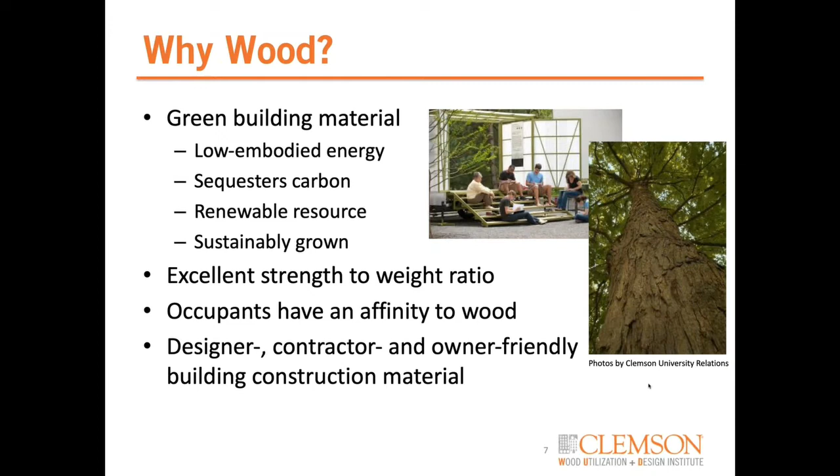For others, it's a sense of peace and calmness. Another architect I think a lot of talks about how when he has a wood column in his building, people touch it—he's even seen them hug it. He said that if he has a building with concrete or steel, you never see people reach out and touch that part of the building; they don't touch a column. But with wood, they almost feel drawn to touch it. There is something about being in a wood building that makes people feel very comfortable, in a very natural environment.

So being a forester, I'm going to start with the forestry side of this world. We're going to talk a little bit about the resources. In North America, we have a lot of forest. While it's not distributed exactly the same across every landscape—the Southeast, the Pacific Northwest, the Pacific Southwest, the Midwest, the Lake States, even the Northeast—there are adequate and wonderful resources of timber available.

There may not always be a sawmill nearby to use that timber, but there is timber growing that could be used. The Pacific Northwest and the Southeastern United States produce a lot of structural timber—2x4s, 2x6s, 2x8s that we use to build buildings. They're priced fairly well in general, and sawmills exist to utilize those materials in this area.

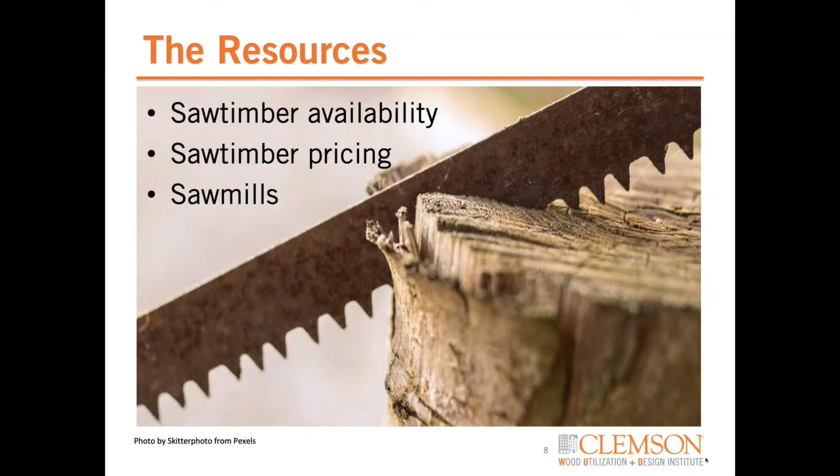So we're going to take a look, dive a little deeper, and I'll focus on data from the Southeast because I have that data available and I'm more comfortable talking about it. But the same data could be developed for the Pacific Northwest or other regions of the country.

In the Southeast, from 2007 to 2014, we saw a 3.4% annual increase in the amount of board feet available growing in our forest. That's the inventory, what's out there growing, above and beyond what was lost to death, fire, or removal. That's just the standing live trees and what was growing—that's how much we increased in sawtimber inventory.

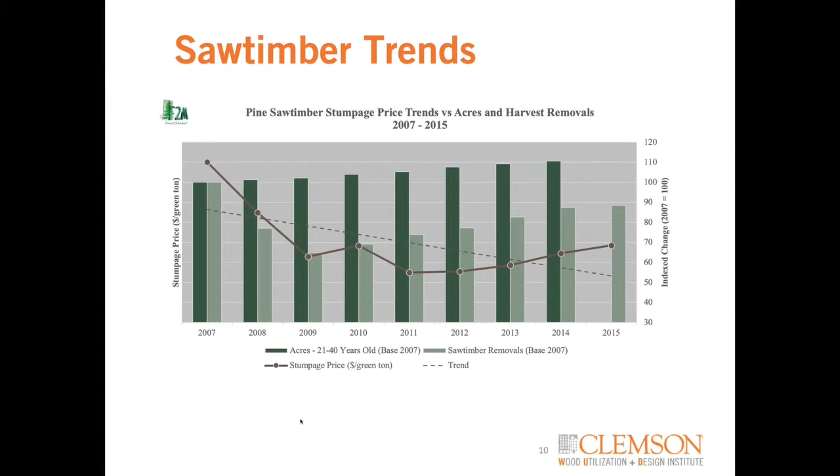That's how we're increasing these acres and ages and sizes of trees, the amount of carbon being stored, all that kind of stuff. The trend line shows you that the price has pretty much been going down all that time in that time frame. Not to say that any one price is given—I'm not talking about prices, just want to give you a trend here.

So what we saw was that in 1987 there was a U.S. government program called the Conservation Reserve Program, and it significantly increased the amount of land being planted to trees. This was pulling land from agriculture on erodible sites, deep sands, windblown sites, and other kinds of land that didn't need to be used for agriculture, and formally putting them into timberlands. This is the 3rd or 4th time the USDA has done that, and I'll show you some examples of when they did it in the 30s. This is the example from the 1980s.

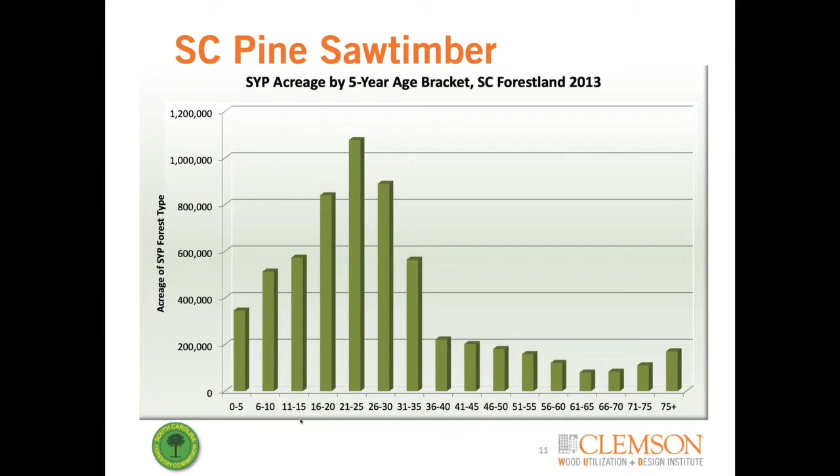But if you do nothing to those pine plantations, they will eventually, in some cases, be replaced with either a mixed pine hardwood stand or eventually a hardwood stand in subsequent successions. But in this case, we're looking at what they look like right now, and that succession may take hundreds of years. So here we go.

A lot of people are always worried about whether our forests are sustainable and healthy. A healthy forest—or an unhealthy forest, such as one with bug damage or overcrowding—is often seen as a problem for wildfires, especially the very destructive wildfires of the West Coast or even the Rocky Mountain area. Even in the Southeast, if we have unhealthy or overstocked forests, we may be more susceptible to all kinds of problems. So we do understand how to be sustainable and have healthy forests.

One of the things we find is that when we have an active forest market, a place for landowners to sell their trees or products from their forest, we're more likely to have well-managed forest in that area. That circle of forest markets and healthy forest is very important. Data has shown that where we have a good forest market, whether a sawmill, plywood mill, or pulp mill, the forest surrounding those mills actually increases in the number and amount of trees grown, giving us more healthy, well-managed forest in those areas.

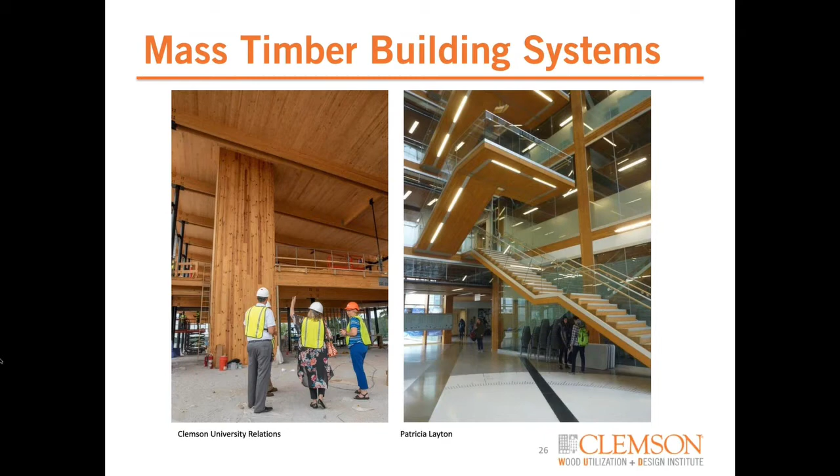If you ever get a chance to go to Vancouver and visit the University of British Columbia, UBC in Vancouver, take a chance to go into this building and see how it is. It's very breathtaking, especially if you're up top in the building looking out across the campus through the atrium glass windows and stuff. It's a gorgeous building.

So mass timber that we're going to use today and talk about in our discussion, I've mentioned cross-laminated timber. We're going to look at nail laminated timber, dowel laminated timber, and Glulam. There are a few other types, but I'm not going to try to go through all of those today, that's for another time and place. These are predominantly the four that have been used most often in buildings in the United States today.

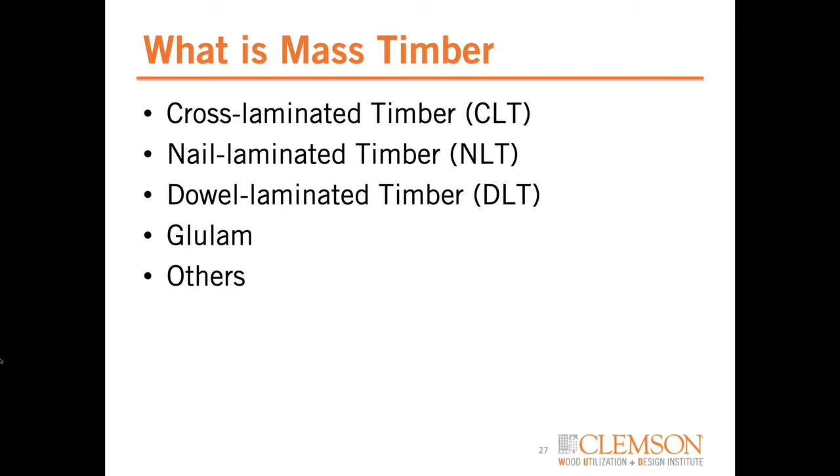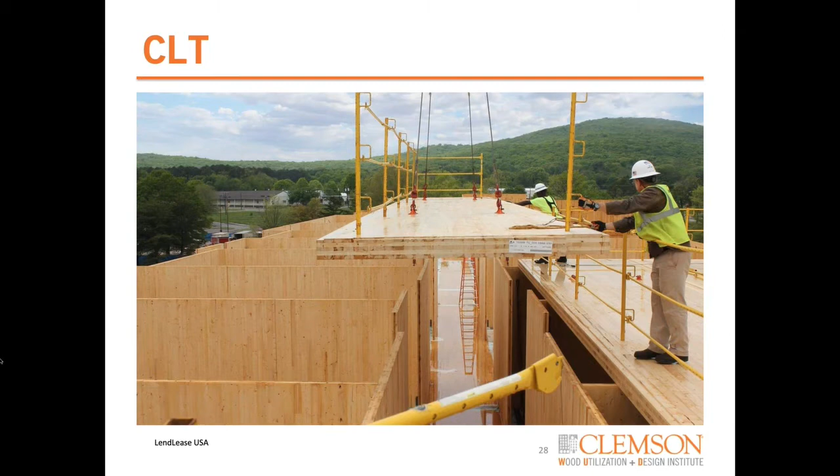Now, nail laminated timber, or as some building codes call it, mechanical laminated timber, is actually just 2x4s, 2x6s, or 2x8s laid on their side and nailed together. This is a very old type of building material, and many old manufacturing sites, mills, and old heavy timber buildings had floors built out of nail laminated timber.

This type of mass timber only has strength in one direction, so it does not have the cross-directional strength of CLT. Since it uses metal nails, when you put those nails in, if you need to cut a hole, you're likely to hit a nail, which might damage your equipment in the field.

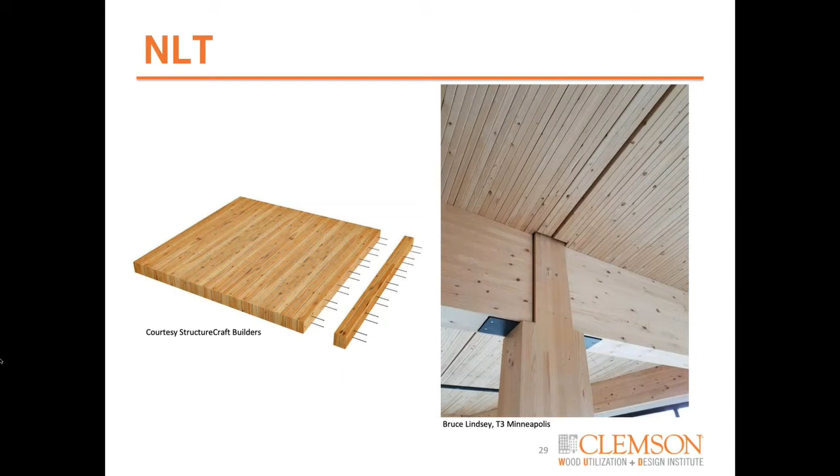So it's really important to think ahead of time about where you might want to put a hole and just gauge it in there. Building around things is really important. You'll see in the picture on the right, from the T3 building in Minneapolis, the floor panels are much longer on one side, and where they needed to stop it, they had to nail shorter pieces of wood together and build that structure on the ground beside the building, then lift it into place. So it does make a difference.

This is DLT, or dowel laminated timber. It's very similar to nail laminated timber, but instead of using metal nails, you use wooden dowels. I always wanted to know how things work, and I figured it out. They use a hardwood round dowel that they heat and dry to a very low moisture content, like 3%. Meanwhile, your 2x6s or 2x8s or whatever you're using is dry to where it needs to be, and then they drill a hole through it.

They've sized the hardwood dowel slightly smaller than that hole so it fits in, and then they allow the wood to come back to the relative humidity of the building environment. As that happens, the wooden dowel absorbs moisture and swells, and as it swells, it fits exactly to the dimensions of the hole and the softwood lumber, and it will not move. So there's no glue in this. But again, you only have strength in one direction - there is no overlapping strength.

And because there is no glue in either nail laminated or dowel laminated timber, you may also get shrinking and swelling of those individual pieces of wood. So you may have to leave spaces between certain areas, every so many feet, so the wood can slightly shrink and swell. If not, it may cause problems with your construction.

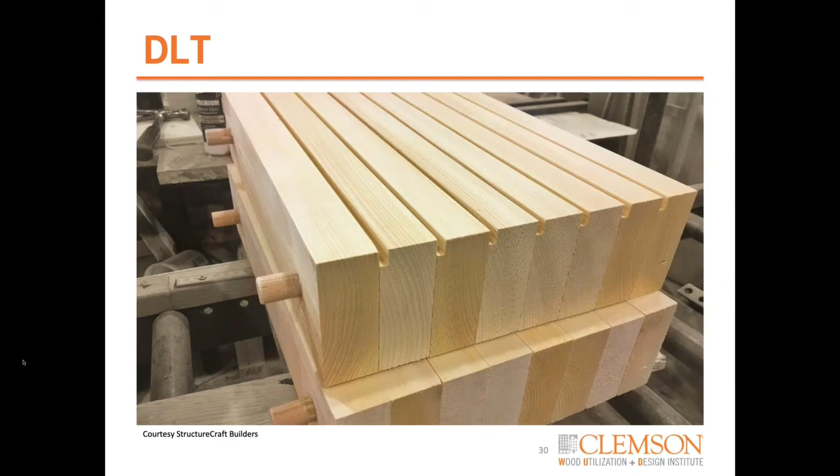We use Glulam beams a lot in commodities, as headers in light frame construction, but there are types of beams that look just like this that are frankly architectural grade, built for beauty and strength. We have the capability with Glulam to build for beauty and strength, and to curve and do all kinds of things with it.

So mass timber, of course, as heavy timber, was very popular 100, 150 years ago. Heavy timber is also considered sort of the residential log cabin kind of thing. That's still been going on in certain areas, but not really entering the commercial building sector, where we'd love to see it enter. Mass timber, the cross-laminated timber, was developed in Europe - Austria, Germany - in the early 1990s.

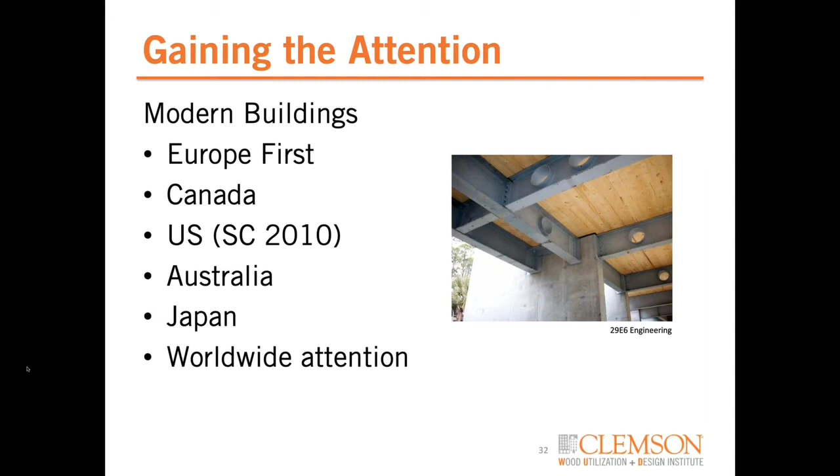It was tested and used there, and then it came over to North America. The picture on the right is the underside of a house built at Hilton Head, South Carolina in 2010. It uses steel beams with concrete columns to hold up the house, since it's an Atlantic oceanfront house, and they used CLT floors above that to build the building. So we've come from 2010, when there was maybe one or two houses, to a lot more now, and I'll show you that number.

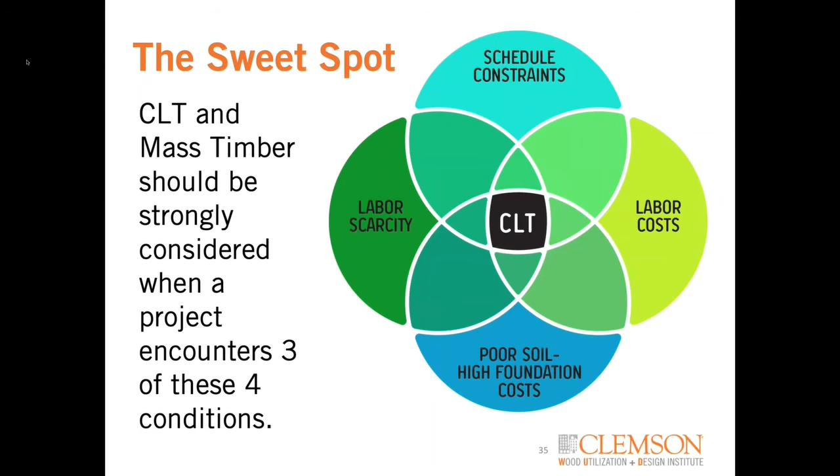I'll add one more: if you're ever building on a university campus while trying to teach classes, please don't use big pounding noises to get your foundations in. We'd love quiet foundations, and CLT has the quietest foundations you can use. I wish that had been the case on a building we did on our campus about 8 years ago—I thought I was going to have migraines every day because it was pound, pound, pound to drive piles or foundations into the ground, and I think all of us were about to go crazy.

So mass timber products are made in North America.

Moving on. By the way, there are at least 3 and possibly 4 manufacturers of mass timber, including Glulam and CLT, in Europe that are producing and exporting into the U.S. They ship it by ocean freight, and it works very well for them. If you put something on a ship, it doesn't use a lot of energy to produce it and move it, so transportation-wise, if you're worried about fossil fuels or pollution, they can get it to the East Coast fairly simply.

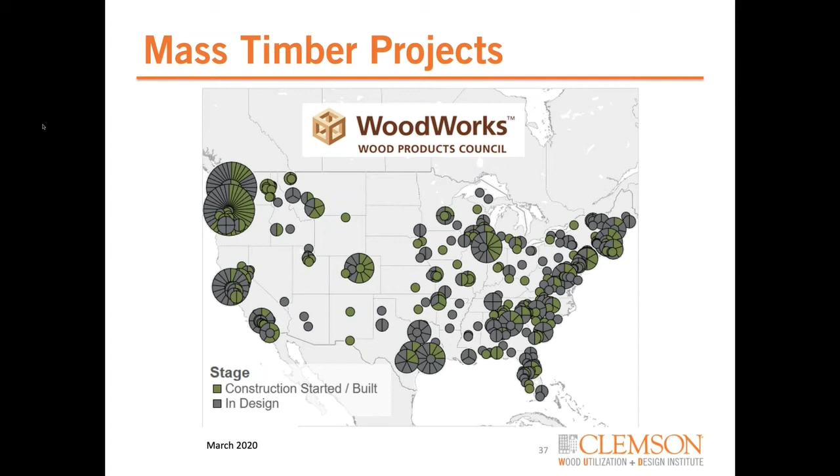If you just Google CLT buildings or Glulam buildings, or follow social media, there's a new building almost every week that you can see going up. As I said, we have one here that we just finished, one that we're starting construction on at Clemson, Wofford College has another one, and another one that just won a regional wood design award in Lake City, South Carolina. And there's more we know are in the pipeline coming up. So even little old South Carolina has some going.

So I'm going to quickly ask, have you visited a mass timber building? Marcy, thank you. Sure thing. Just quickly let us know.

All right, I'm going to go ahead and close and share the answer. So we've got about 56% say that they have not, and 44% say they have visited. Okay, wonderful.

If you have not visited a building, I encourage you to do so. It's quite an experience. While some of them are not open to the public, others are. If Clemson opens up again and we start having our buildings, we hope to be open again by fall semester. If you're in this area, please let me know, I'd love to show you around one of our buildings and maybe even show you the construction of a building on our campus.

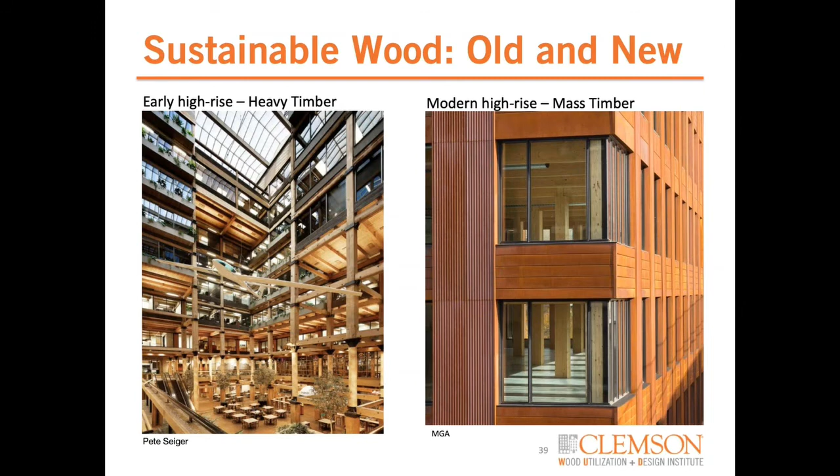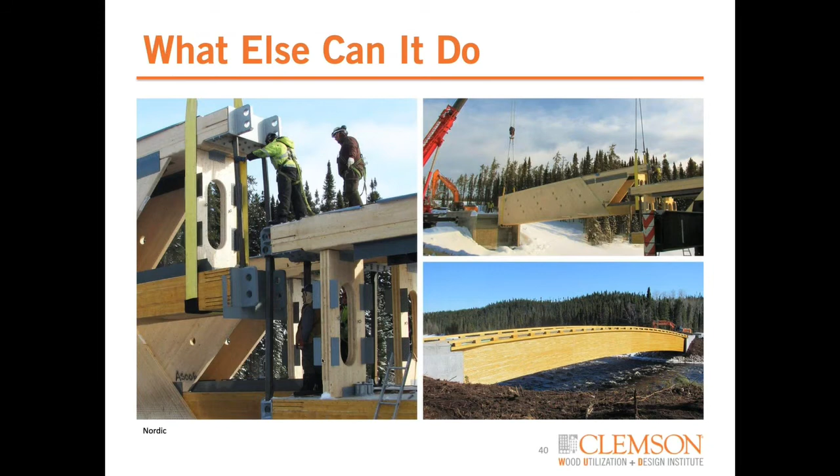But what else can mass timber do? Here are some examples we'll quickly run through. This is a bridge, supplied by Nordic. Nordic lives in and works out of northern Quebec, and they've had to build bridges to get to forest operations or to have their employees get to work. So they've used glulam and mass timber to do it. The structure on the left, where you see the holes cut out of it, those are cross-laminated beams, panels, and then the beams, of course, are glulam beams. They do a very good job of that.

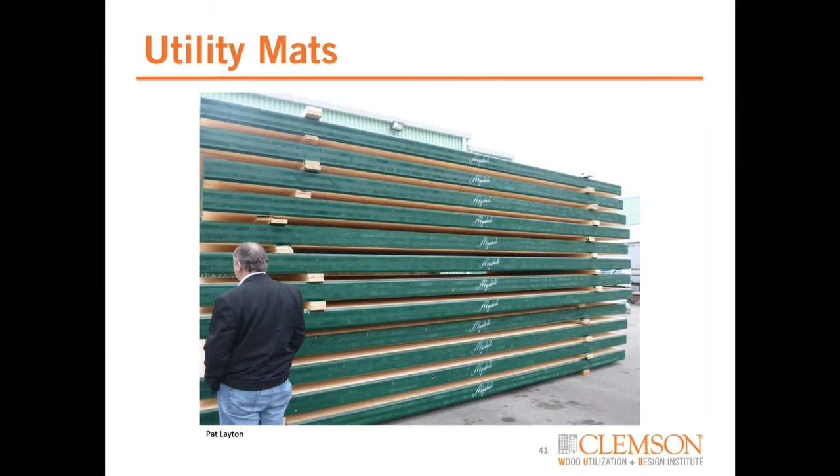These are utility mats, with big use in the oil and gas and construction industry. If you're putting something down on poor soil and you need, like, a lift truck or a crane, or even heavy equipment to get to a muddy site, these utility mats are laid down like a road or like a platform. They're used and reused, picked up, used again in another location, and are very excellent mats, well used. There's such a need for them that 3 plants have been built manufacturing these just for utility mats out of cross-laminated timber.

Barns and factories. This is a manufacturing site. Looks like it could be a barn if you needed it to be. This is in Rockwood, Tennessee, and this is Sauter Timber Company, and they actually buy panels from Europe that are CLT panels, and then saw them to design needs in their own factory here after it was finished. They are building houses and buildings all over, and have now opened up an operation in California also to do the same thing.

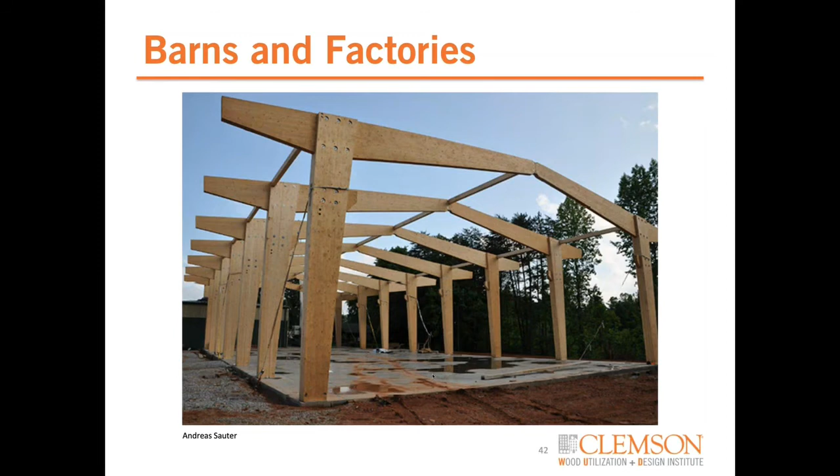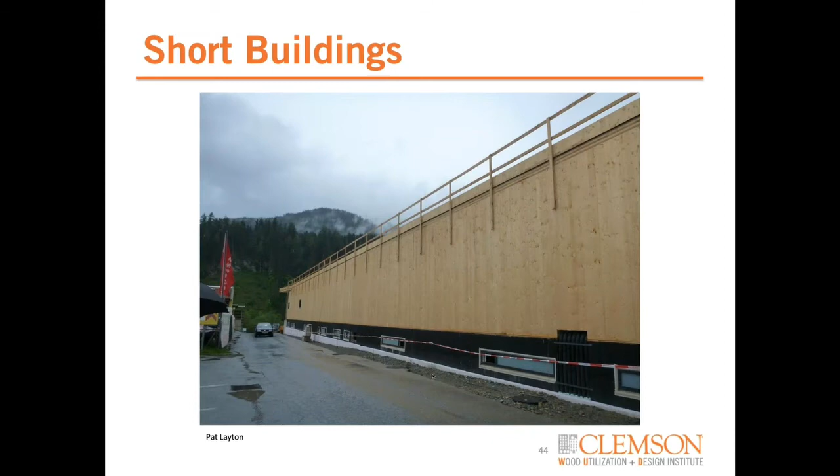You can build tall buildings like the University of British Columbia in Vancouver's Brock Commons, an 18-story building on a concrete podium with concrete stair and elevator shaft for strength. Short buildings - this is a soccer stadium that was being built in Austria when I visited with the manufacturer there. So it doesn't have to be big.

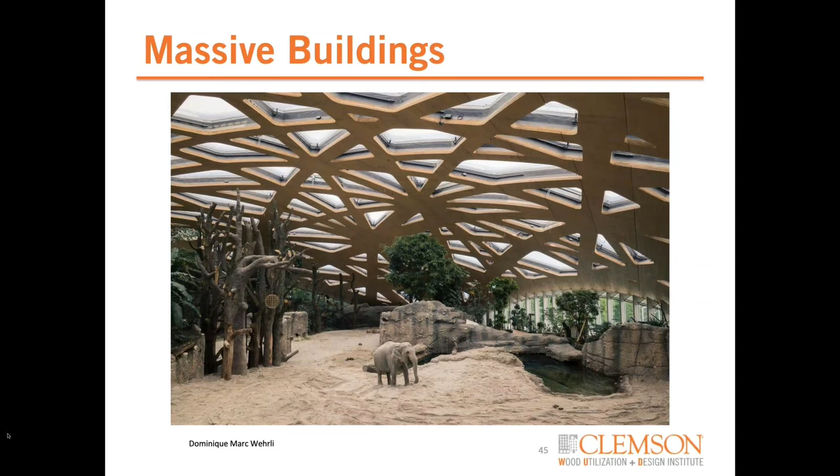And then massive buildings - this is the Zurich Zoo in Switzerland, and you can find here the elephant. Let me go back and show you - the elephant is right here in the lower middle of the picture. By the way, I did want to point out, a lot of people are wondering why don't we do this with hardwood. This building is hardwood. The development of a manufacturer using European beech, which is what this is made out of, does exist in Europe. It does not exist here in the U.S. There are some steps we all have to get through to have a hardwood manufacturer of CLT, but this is one of them, and a beautiful use of European beech.

Speedy construction - you can see that elevator shafts can go up this way, or they can go up partially one way or the other, but the building goes up very quickly, and you can do about a floor every 2 weeks for certain, maybe less if everything's working right and the weather cooperates.

By the way, I always get questions about what happens when it gets rained on. Yes, we know it's going to get rained on. In fact, they built one of these hotels in New York and it got snowed on almost every day, and they had to get the snow off. But because these panels are dried and then glued, and they're very consistent, if you dry out the wood, squeegee it off, or just keep the building open a little while until you get the dryness you need, you don't have moisture problems during construction, and it's okay to build.

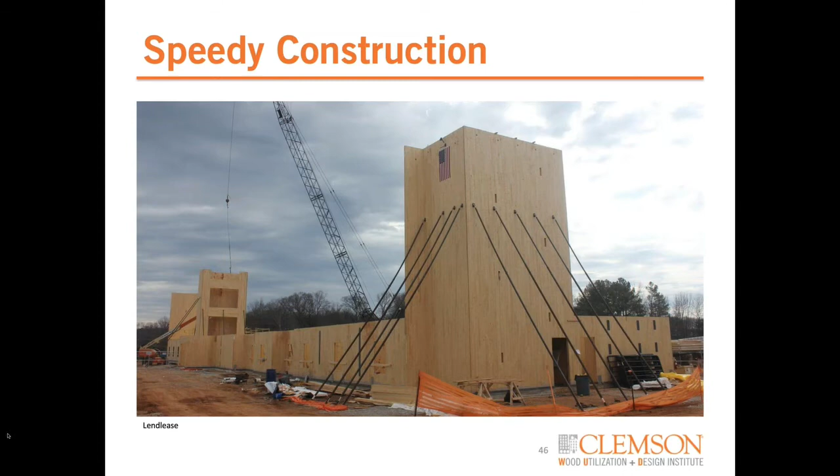The only time it's difficult to build is with high winds. If you're trying to lift a large flat panel and you've got high winds, you can't control the crane very easily. So the only weather constraint that's going to hold you back is high wind.

We've done a lot of research on these buildings and these types of products. Of course, Glulam beams are a very old product, manufactured in the United States from southern pine for probably almost 100 years, and other species too. But one thing - if you've got wood floors in your house, you know you can hear people walking across it, or feel the vibration in the motion.

So we really wanted to understand vibration. This is a 40-foot long panel, held up at each end, so a 40-foot span, and you can bounce on this to a certain extent. We were just looking for simple vibrations of a footfall, and we have to take that into account and understand how to design around it so we don't get uncomfortable vibration in the floor for each building use. There are building codes and design standards about vibration, so we know how to do that.

There are also acoustic standards we have to use, and this wood often needs an acoustic mat and a concrete topping on it to prevent vibration and sound from penetrating. That's taken care of in some of the design standards if you're ever building with these.

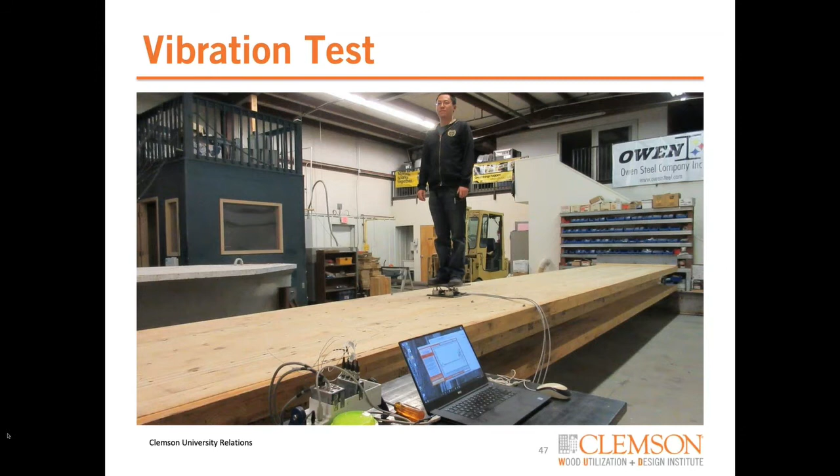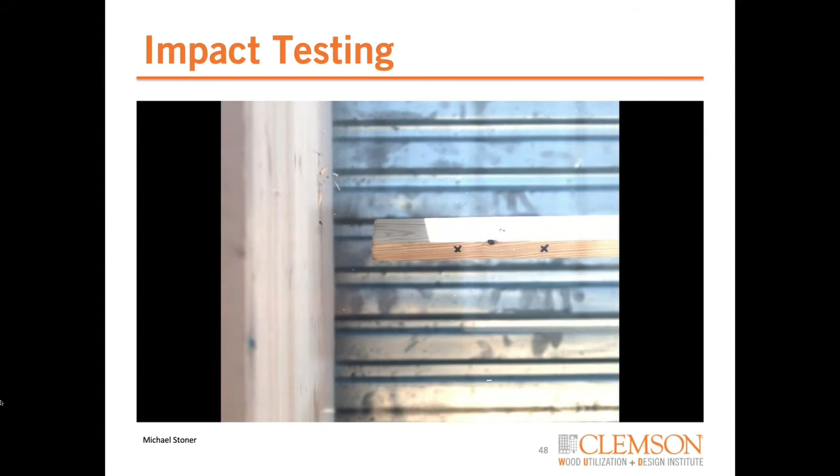This is some work we're doing because we live in a tornado and hurricane weather system. This is an example of a 15-pound 2x4 being shot at about 80 miles an hour out of an air cannon to see how much damage you could get, or what happens when something like that hits one of these wood panels. This is a 3-ply panel we were working with, and I think we tested up to 100 miles an hour, whatever the standard is for impact testing.

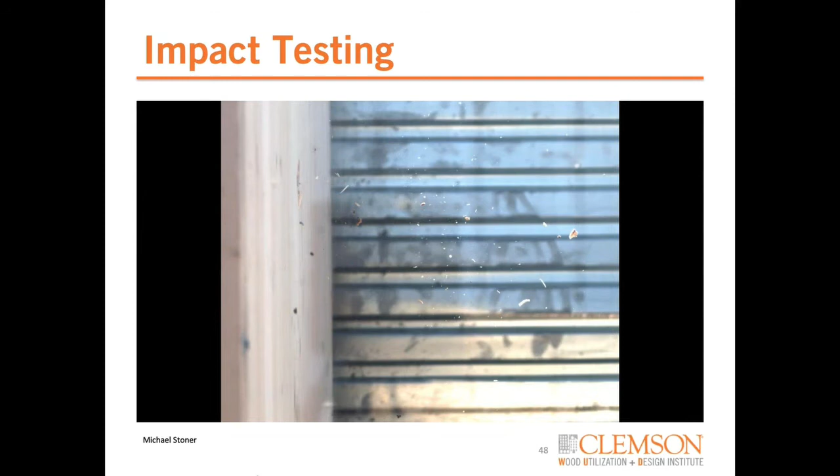We just had a PhD finish his research on this impact testing, and it's really interesting to watch because it's such an elastic system in the middle. You get a lot of movement in the middle, but at the edges of the panels, where you're connecting them together, it's a very stiff system. So really understanding that total model of how you put things together and what your impacts are going to be is one part of the study. You'll be seeing more coming out later in the engineering journals over the next 6 months, we hope.

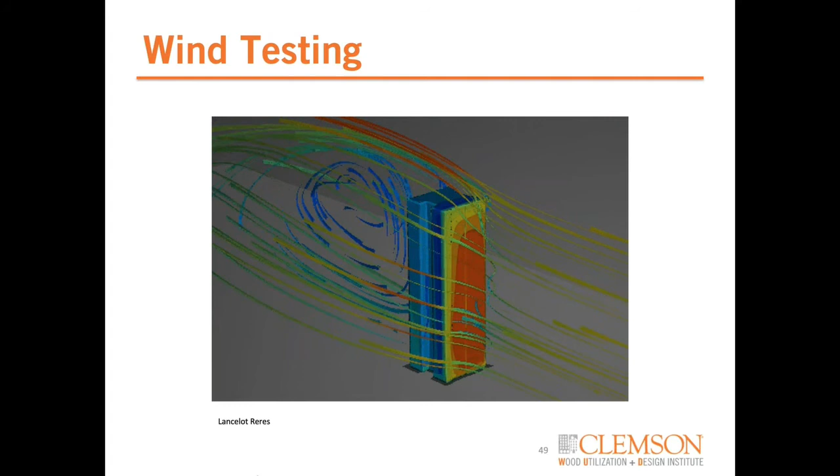Another thing - if you're going to build tall, you've got to deal with wind issues. Steel, concrete, all tall buildings have to deal with the effect of wind. We actually have a student here at Clemson looking at how we deal with wind, and this diagram is an example of how you model winds and wind systems in wood buildings.

Another thing we're doing - we have all these panels coming together, and they have to be connected, turned into diaphragms or large systems that we'd like to act in composite action. So we'd like to know how stresses and strains affect these diaphragms. This is the beginning of a test we did on a diaphragm of 5 by 10 foot panels put together for a 6-panel grid of CLT. We did this test early, and we're going to be publishing on it.

We were also looking at unique connection systems. We have about 3 more of these tests to do with different types of connections. Currently, when you're putting these together, you basically create a slot on each side of the panel about an inch deep, lay the panels together, then put strips of plywood down to fill the hole, and screw through the plywood into the panel itself. Using that plywood connector on top and the screws down through there, that's how they've been connecting these before. You can see some straps that might be used, some other techniques - these are things we're developing, designing, and working with manufacturers on, to figure out how to best connect these large panels of wood together.

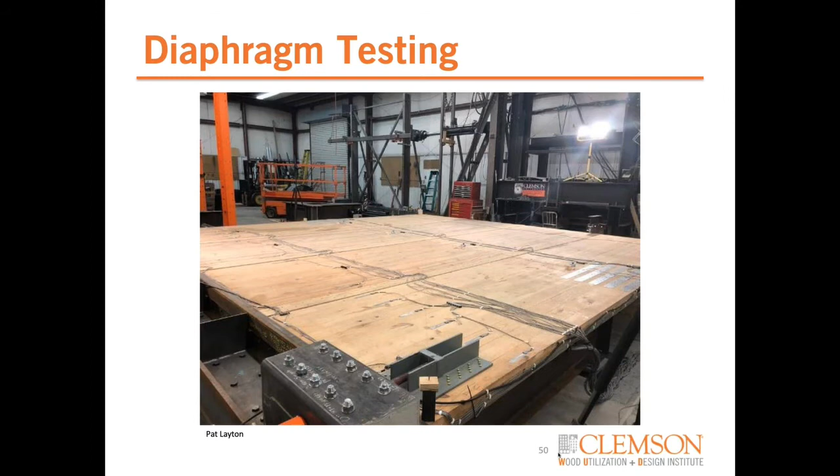Everybody's interested in moisture. The building at Clemson, as well as Brock Commons, Carbon 12, and a few other buildings across the University of Arkansas and others, are part of a moisture sensor test going on across Canada and the U.S. Our building has a boat shed with an exposed roof of CLT and glulam beams, and we're testing at 1, 2, and 3 inch depths for moisture in the wood from being exposed to nature. This is not the interior of a building, it's open to the air. We do have the same sensors within the actual building, all part of a monitoring system, and these will be used to fill in the data.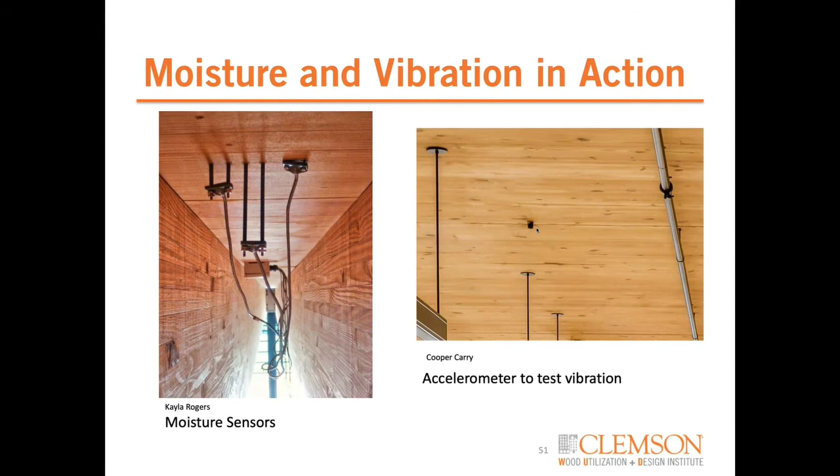On the right, the little black thing in the ceiling is an accelerometer to test vibrations. The room above can be used for exercise, classes, or a meeting space, so we're looking at the accelerometer to see if we can tell any difference between uses and any vibration that might come through from the floor above to this ceiling.

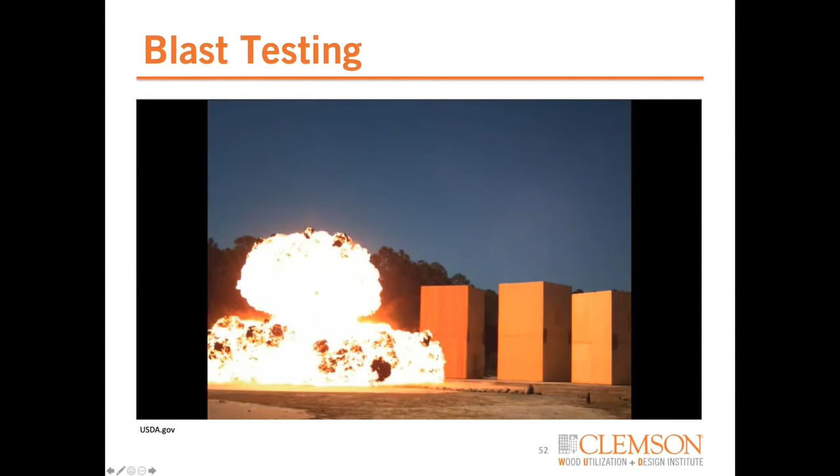Other partners have gone together to produce blast testing results. The DoD originally required blast testing on all of our buildings on DoD bases. I hope you can see the blast going off - just to give an example, they tested this system using, I think, 3 different levels of TNT. This was done at Tyndall Air Force Base, and these videos, if you want to look them up, are on the AWC website.

If you look up close, you can actually see the building move in and out. They did take them down afterward, or rather pulled out any damaged pieces and repaired them. So we looked at whether, if there is damage to a building, you can pull out a panel and repair it in some situations. It may be that we're going to be thinking about deconstruction and reuse of some of these buildings into the future - instead of just discarding wood from a building, how do we reuse, remanufacture, or recycle that wood in the system?

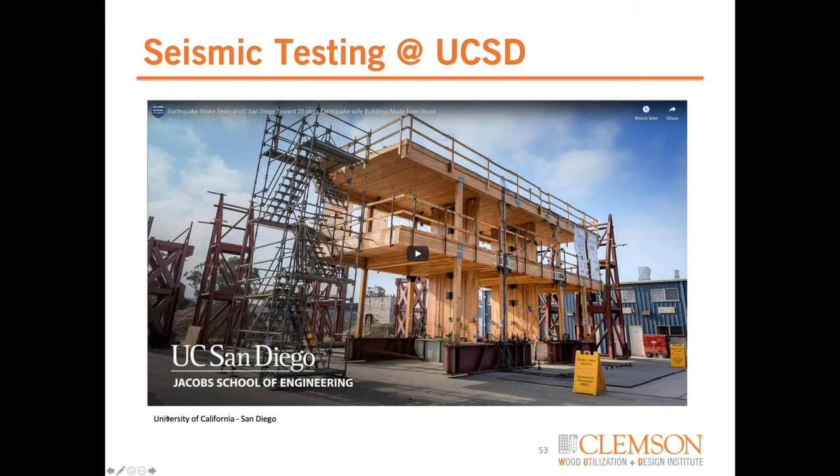Another interesting piece - as you know, there's a big area of wood buildings in the PNW and West Coast, so seismic testing was also a big portion of this. I'm going to show you just a minute of this. I'll be quiet because the sound on this is going to show up, so here you go.

It's not streaming. Okay, then I'll stop it immediately.

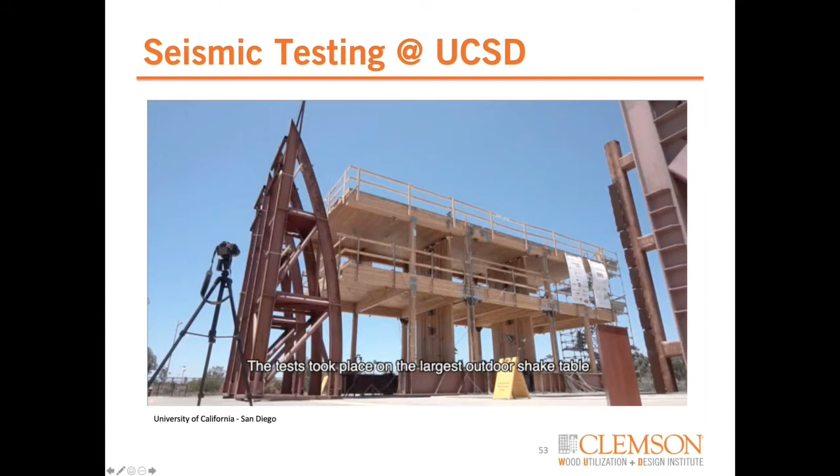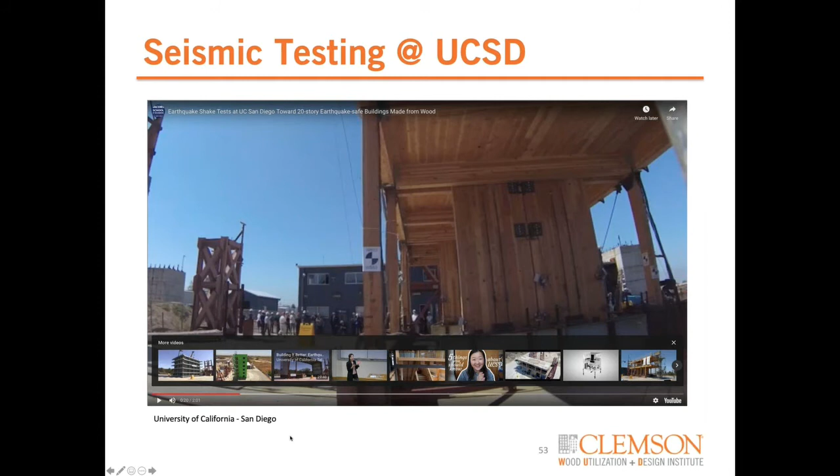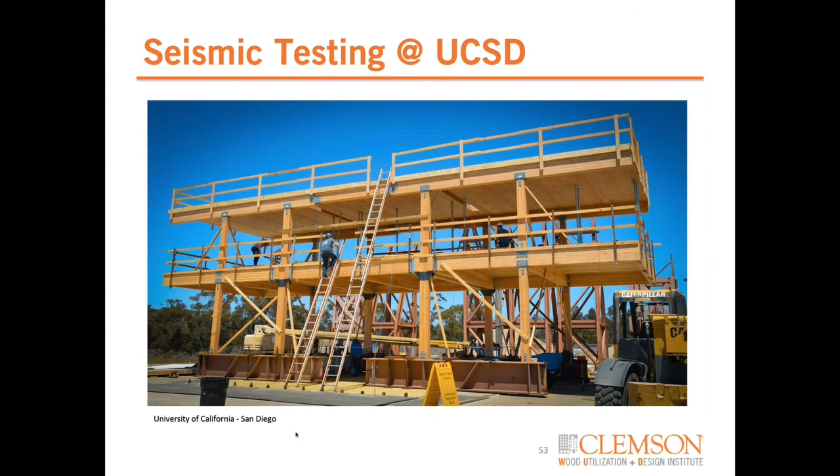You can see in this picture that they shook it up to the 6.7 earthquake, which is the Northridge earthquake in California. We were looking at different tests on this, with different connections and different types of construction being used and evaluated. Just want to mention there's a 10-story shake table test coming up in the next year - hopefully in 2021 we'll be building a 10-story building and shaking it also. Everything coming out in mass timber and going into building codes is being tested very rigorously, with a lot of cooperation to make this happen.

When I first asked a group of my students if they would live in an 18-story building made of wood, they immediately said no, we'd be scared of fire - and they're foresters. So I think it's important for us to step back and think, and I know there are several fire code officials and fire marshals on this today, but we know that wood is combustible and other building materials aren't. However, some of those non-combustible materials are not fire resistant, whereas wood, while combustible, is very fire resistant, especially in large sizes. So as we developed and built these cross-laminated timber panels, it was important for us, and this developed the mass timber building system.

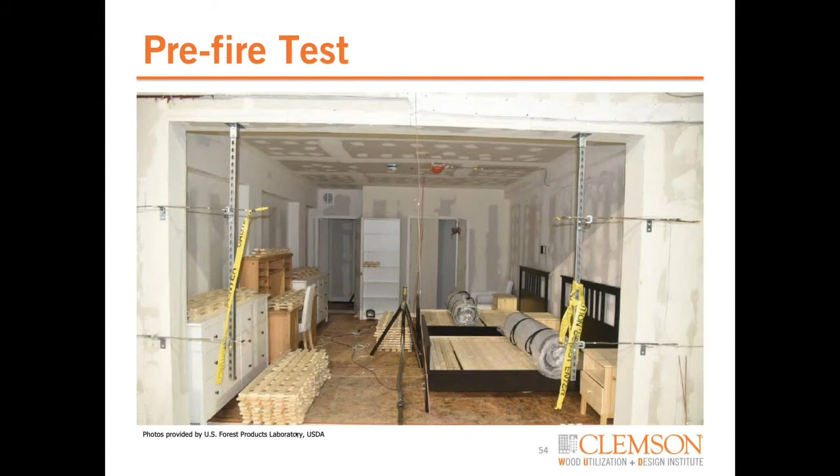They set the ignition, and three hours later, this is what we got. The fire put itself out without sprinklers, even with these large openings. In a normal closed-off room, you'd never have enough oxygen to burn this much unless the windows exploded or something, but we wanted to give it the most extreme conditions we could.

There's been testing done here. The one I'm showing you now was done at the Alcohol, Tobacco, and Firearms Labs. There was also testing done at the National Institute of Standards and Technology, and similar tests in countries around the world. Canada has done fire testing too, and we do a lot of fire testing not just on compartments but on connections where two beams combine. There's been a lot of testing on this available, with videos in lots of places, and it's really important if you want to read more about the fire resistance of wood.

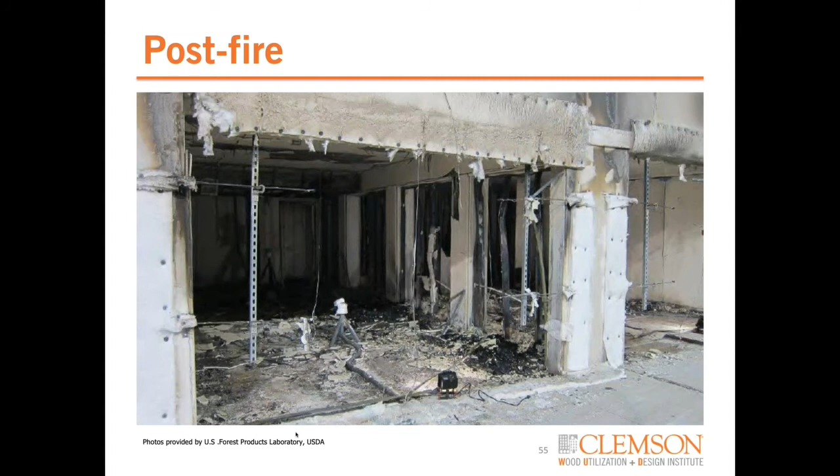I was very happy to visit Nottingham in England, where I met with their fire department. They were building a mass timber building at the University of Nottingham, and during construction it unfortunately caught fire. Because it was under construction, there's a let-burn policy, so they let it burn. I talked to the fire service, and they said that based on the post-fire experience, they would have felt more comfortable going into this building, because even after burning, there was still structure that would hold up a fireman if he had to enter to save someone. Whereas with metal, which isn't fire resistant, that strength goes away in hot fires, and you wouldn't feel safe walking on a metal floor in a burning building. It was quite interesting to me—I'd never thought about any of those things before, but I've learned a lot since I started working on this.

So, are any of you currently working on the design or construction of a mass timber building? Potentially maybe even in coding, or working with the codes for a building of this type?

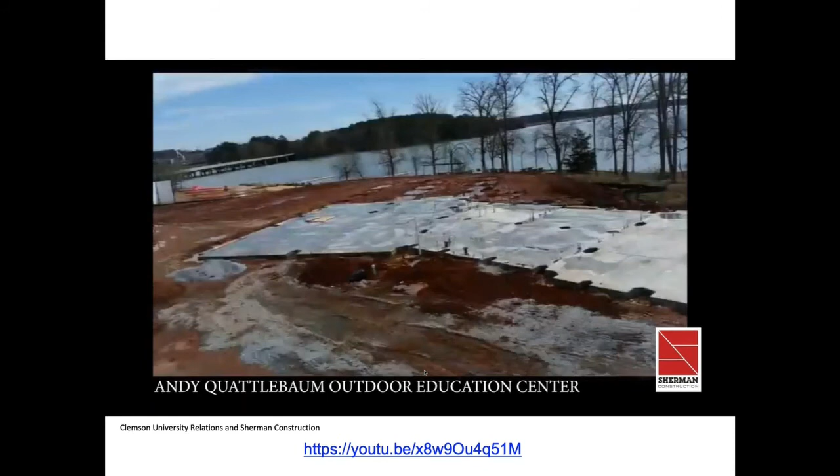Marcy, can you see any of this? This was the winner of 2018-2019, and this is how the site looked as we got started. And if it's not showing up, Marcy, I'll skip it.

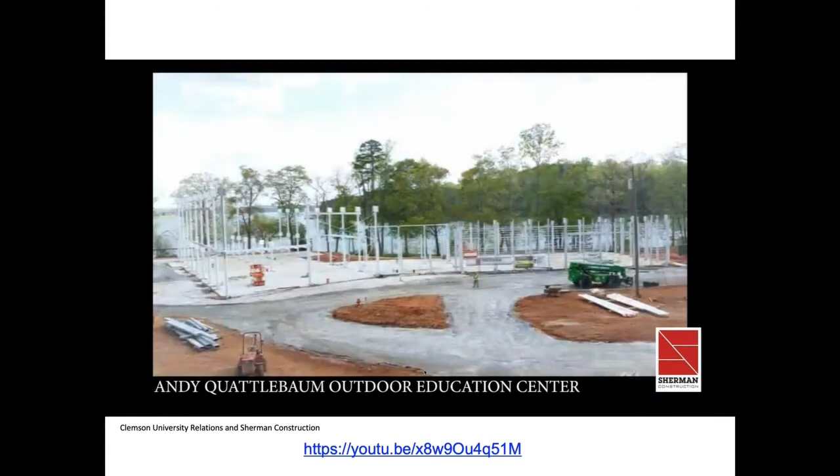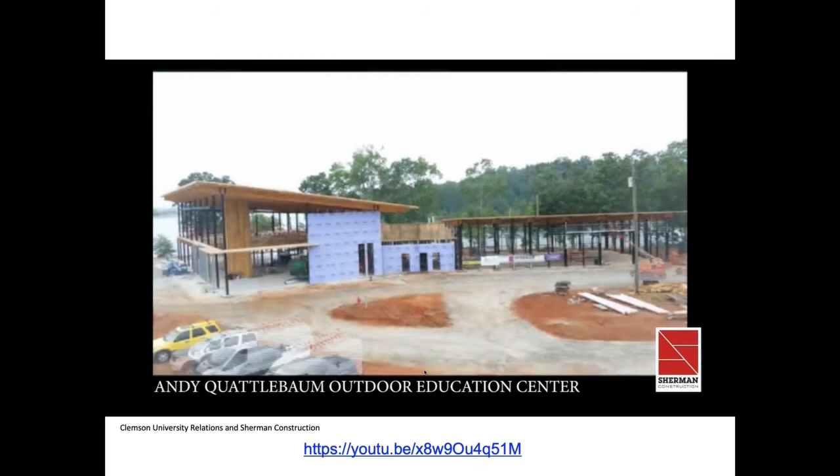But most of the structural work on the wood was accomplished in less than 10 full working days. So I'm going to close that out now because they're just finishing up the building. We used about 282,000 board feet of CLT and 72,000 board feet of Glulam timber in this building.

And as you notice, we did not do a post system. Our posts were steel because we wanted a very open, clear area within the building. So that combination of a hybrid steel, CLT, and Glulam worked for us.

When I did the totals, I looked at 20-inch pine trees grown here in the southeast and found that you would average about 400 board feet. And if I used every piece of board feet in there, I would be able to do this building with 885 trees. Now in reality, not every piece of board or dimension timber that came out of a tree goes into it, but it was the equivalent of only 885 trees.

And if I grew those to an age of 25 or so before I harvested it, I could do that with thinning and lots of returns to my landowners, and still pull that off in a harvest on 24 acres. So not a big area to go with. Really interesting ability and a very small amount of wood, frankly, to build that beautiful building.

So when we have well-managed forest, when we have good design, and when we have buildings that are designed to where it's easy to maintain and where there is no water intrusion, so the exterior pieces, anywhere that water could hit on our building, we were very particular on the design details and how we were covering up, and what our maintenance schedules and things are going to be. We can build sustainable, durable buildings that will last for many years.

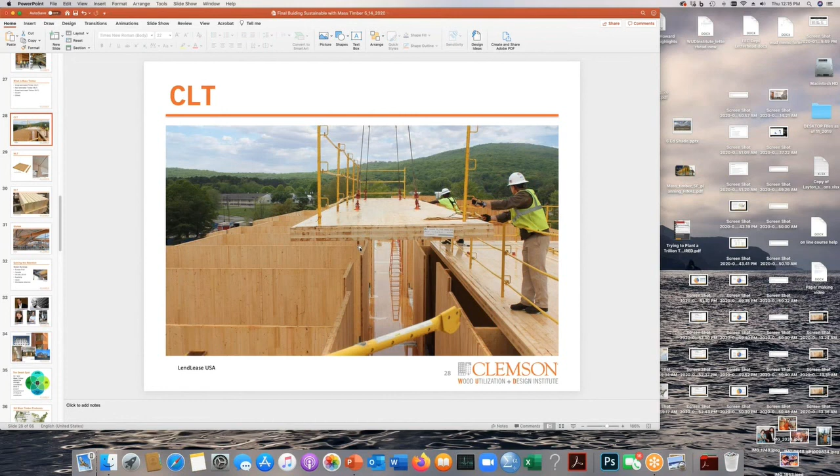When we develop CLT, cross-laminated timber, if you look at this picture—give me a second to pull it up—you can see that when you manufacture CLT, you make long pieces of wood, 40 to 60 feet long, by finger joining 2x6s and 2x8s. You lay those down, put glue on top, and then come in with a layer across the opposite, perpendicular direction, doing the same thing—laying wood across there, maybe 8 or 10 feet wide depending on your manufacturer. Then you come back with another layer in the long direction.

The way we direct these long and short layers can vary depending on the purpose of the material. But by crossing or laying those down in perpendicular layers, we make an engineered piece of wood that has strength in two directions. When we choose to use nail laminated timber, we have strength in only one direction.

So the panel will have different properties, and those properties are chosen in the engineering design of a particular building. The nail laminated timber has strength in one direction and may be used in a different size mode, for example, or for different strength needs than a cross-laminated timber panel. So it really is about how you're engineering the strength of the building as to which you choose.

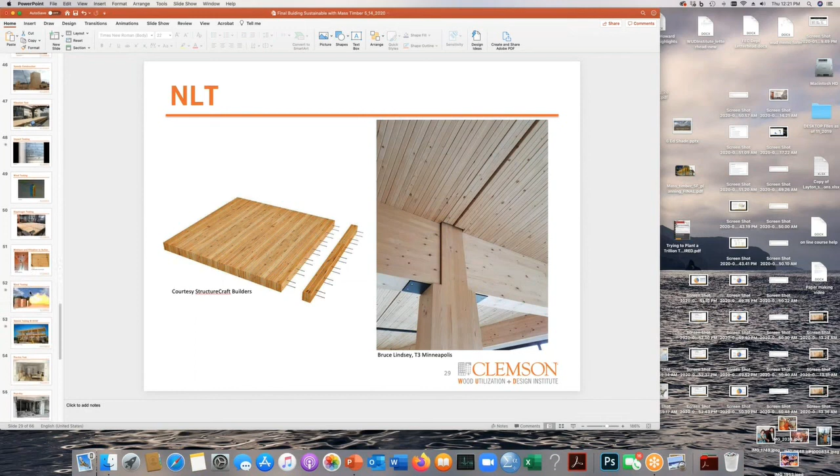Well, while we're waiting, and I didn't show very much of it, I could show a little bit more of this slide where we were building our building here at Clemson. Let me go to full screen. Y'all can still see my slides, I assume? Oh yeah, we can see your presentation.

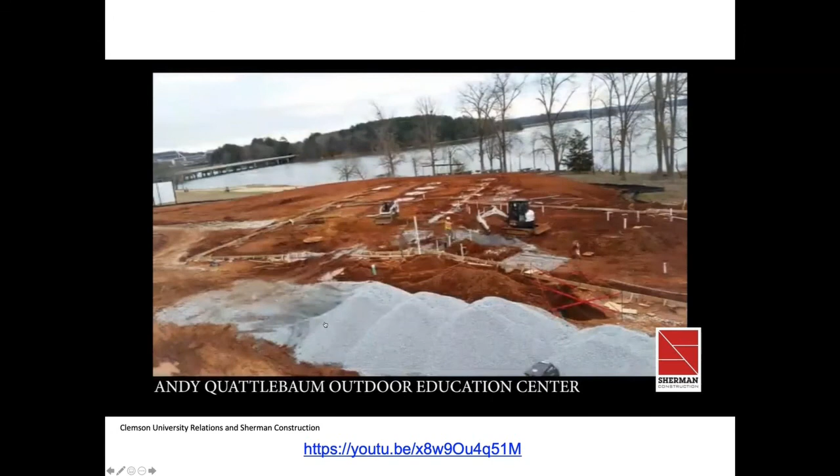Another aspect in choosing the system is what the architect wants to see when looking up at the ceiling—do they want to see nail laminated timber or glue laminated timber? There are also systems where we're using glue laminated timber beams set flatwise.

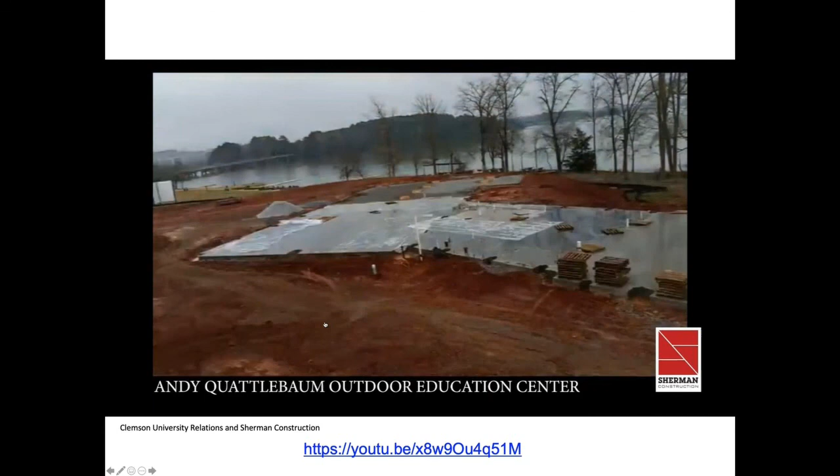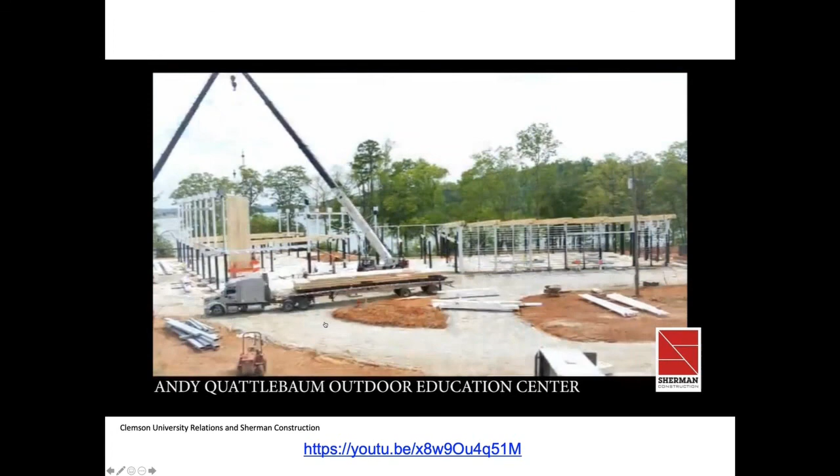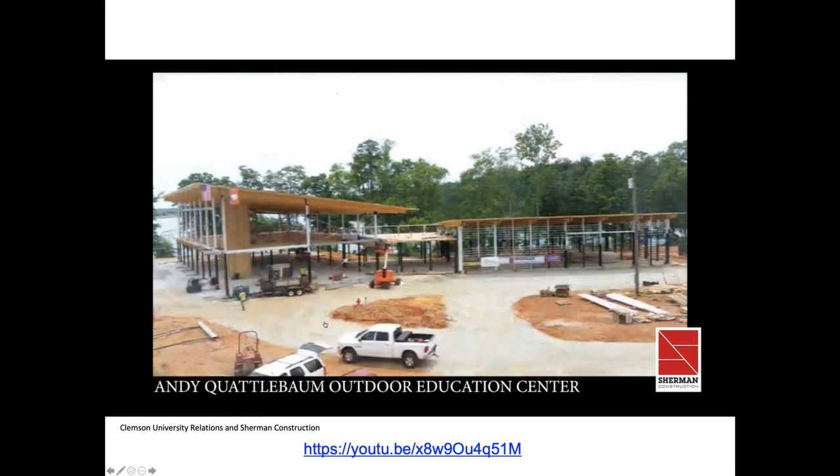Yes, absolutely. In fact, one interesting piece about this building—I was looking at the data the other day—we used CLT. Some of the people who bid on this building bid to do it in not mass timber, but steel or other traditional alternative materials. Because we did it with wood and had an architecturally visible ceiling and didn't have to add sheetrock or other materials, this building, as built, came in below the cost of the other traditional building materials. So they bid it out, and it did come in below cost.

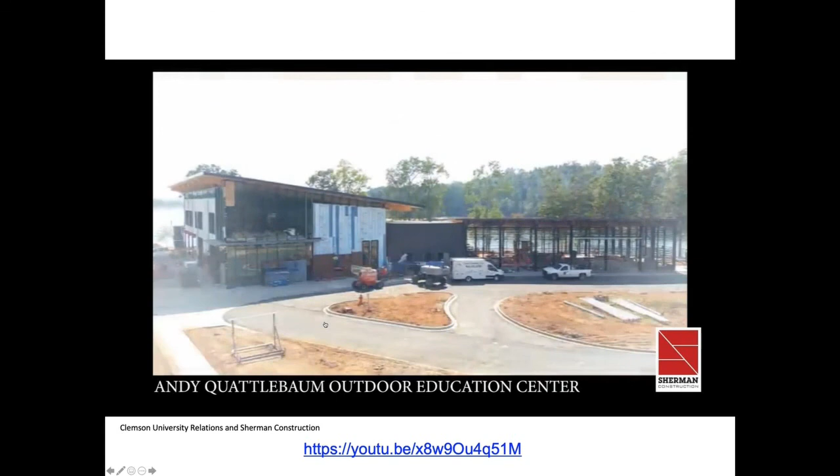So while people think it's expensive, it may not be as expensive as you think. Again, you can't look at a square foot of concrete versus a square foot of CLT and just assume one price is more or less, because it's a building system—you have to look at the total cost of the building.

In fact, with our building and with the Lend-Lease hotels—there are webinars out there about the Lend-Lease hotels—you find that the speed at which these buildings were constructed and the fewer number of people it took, the price goes down substantially on the total cost of the building.

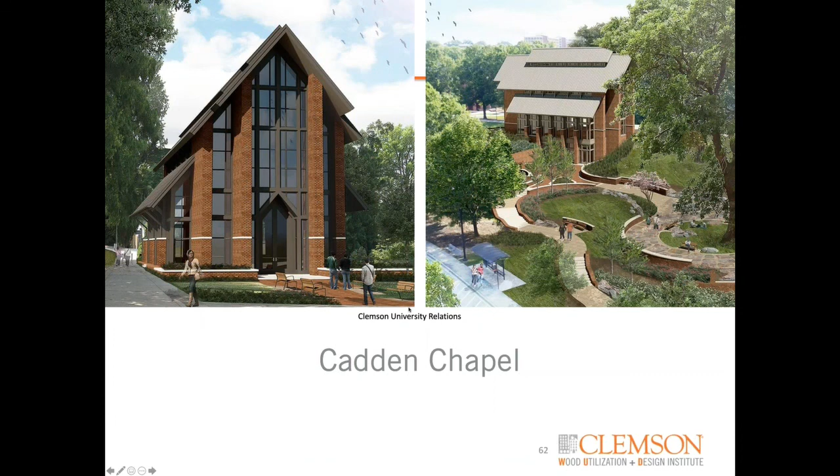That is a very good point. I think that's something really important, and I'll add this for the engineers: when you're working with architects and starting to design a building, since we don't have a specific standard of exact sizes for CLT, panels can come in different widths and dimensions depending on the manufacturer, and even the dimension of the lamstock itself can differ from Europe to North America.

It's important to understand what product you're using early on. Really reaching out to the producers and getting bids for working with one producer or another is important, and then getting their help in thinking about your building, your design, and your engineering.

There's a very good webinar I've seen by Greg Kingsley that talks about how, by choosing the distance between beams, or how you organize the repetitive bay structure of the building, you can greatly impact the cost of materials. He does a great job in his seminar comparing that to what it would cost in steel or concrete, and those alternatives also vary, but the wood substantially varies.

You can really optimize the amount of wood you're using without waste, and enhance the constructability and use of that wood, making it even more efficiently used.